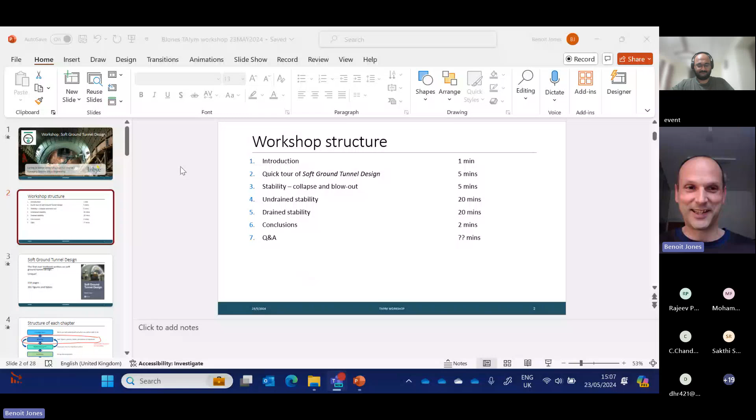Great, thank you. Okay, so to introduce the workshop, it's called Soft Ground Tunnel Design. I won't be able to, in just under an hour, tell you everything you need to know about soft ground tunnel design, so I'm just going to focus on a couple of key things.

So this is the structure of the workshop. We've done the introduction. I'll do a quick tour of the textbook, just so you get an idea of what's in it, and then going to focus on stability, which is the most important thing in tunnel design, and it's the thing that pretty much drives all your decisions about what construction method to use. We'll look at collapse and blowout, and then undrained and drained stability with a couple of examples, and then there'll be conclusions and time for some questions at the end, hopefully.

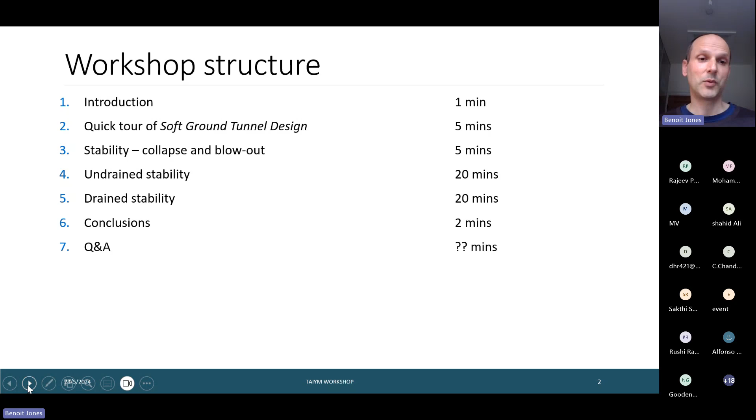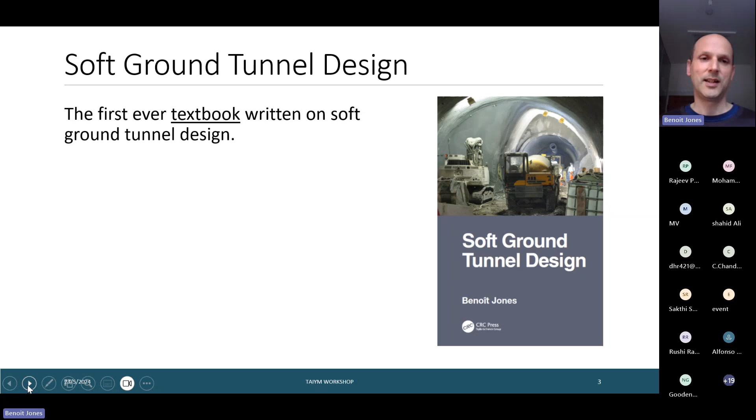So this is what the book looks like. You can get it as softback, hardback, or ebook, or whatever. I say it's the first ever textbook written on soft ground tunnel design, because although people have written books, I don't think any of them has been comprehensive or has included worked examples.

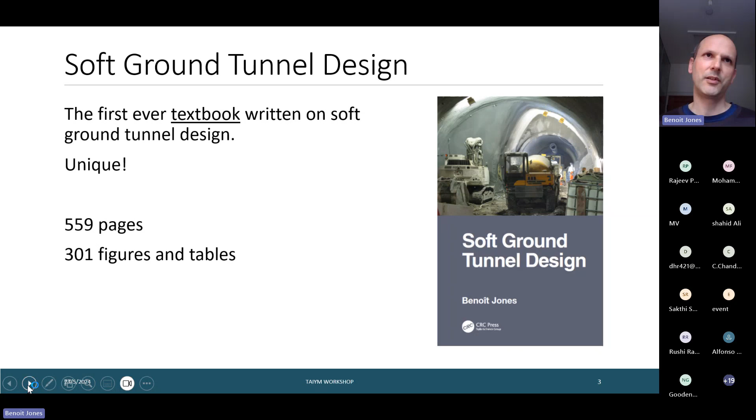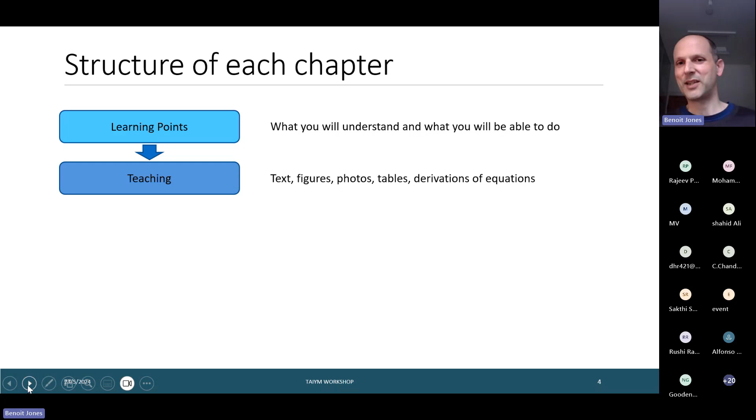So I'll show you what I mean. Each chapter starts with learning points, like what you'll understand and what you'll be able to do at the end of a chapter. It then has what I call teaching, which is the text, the figures, the photos, tables, derivations of equations. And then there's worked examples that show you step by step how to do it. I actually found when I was doing the worked examples that I then had to change the teaching bit, because it's only when you try to go through it step by step that you realize, oh, that bit of information needs to be presented, and you need to make clear that assumption and things like that. So I think that actually improved the writing of the book quite a lot.

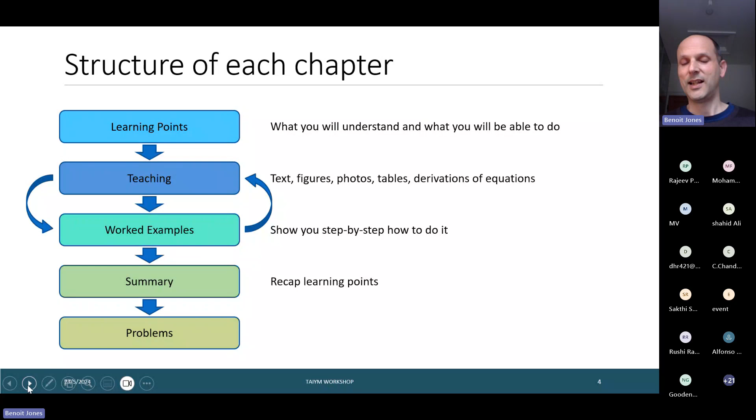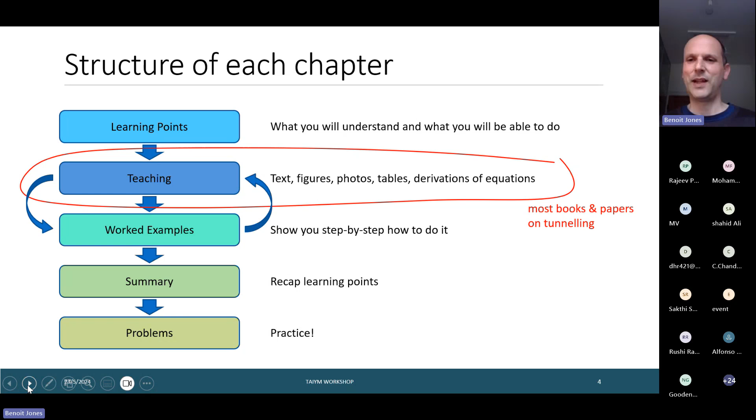And then there's a summary which recaps the learning points, and then at the end of each chapter there's problems to enable you to practice. I'd say most books and papers on tunneling just do that bit, and they don't do all the rest. I assume when you've found a journal paper or a conference paper about a subject you're interested in, you find there's missing steps in there, or it doesn't set out in a worked example how you're meant to do it in the way they've done it, or to apply this knowledge. So hopefully this kind of textbook is filling a gap there.

So there's lots of chapters. Starts off with real tunnel behavior, then undrained stability, drained stability, stability of shafts, stability and Eurocode 7, which, although it's European, is kind of showing how you apply partial factors in different limit states.

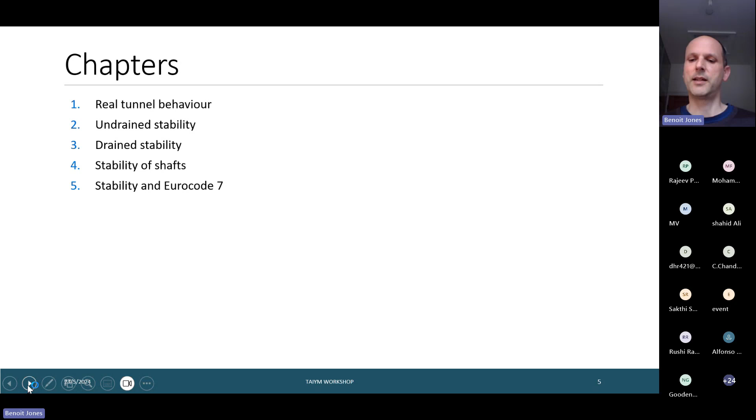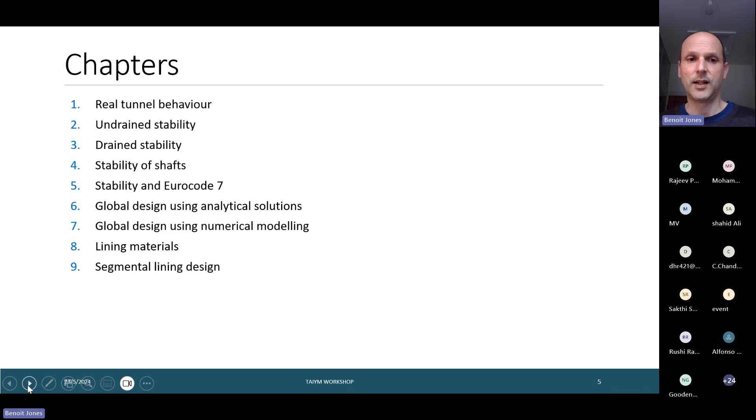So it's kind of an example of that. And then there's global design using analytical solutions and numerical modeling, lining materials with particular focus on fiber reinforced concrete, and segmental lining design for transient loads like demolding, handling, stacking, transporting, loading, jacking and grouting pressures. Chapter 9 is about ground and groundwater pressures on the lining, and chapter 10 is everything else before that point.

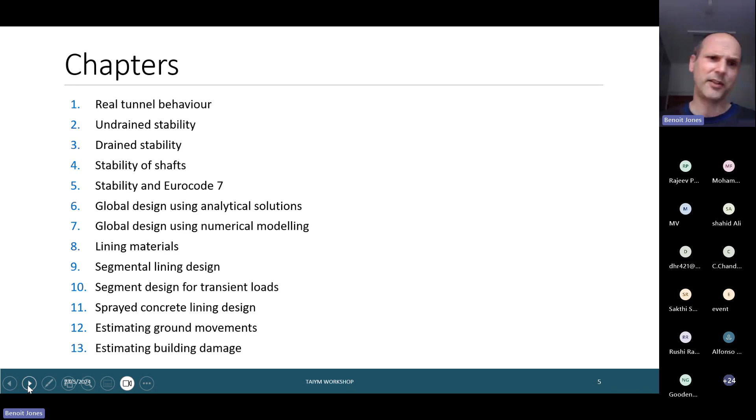Chapter 11 is sprayed concrete lining design. Chapter 12, estimating ground movements. Chapter 13, estimating building damage. So you can see they're grouped: chapters 2 to 5 are on stability, 6 to 11 are soil structure interaction and the structural design of the lining.

Chapter 1 is really everything, because using real case studies it shows data about ground movements around tunnels, surface settlements, subsurface movements, and lining stresses, strains and deformations. The idea is to give the reader a conceptual model in their brain of what is going on when a tunnel is being constructed and then into the long term. So it sets you up for understanding the rest of the book after that.

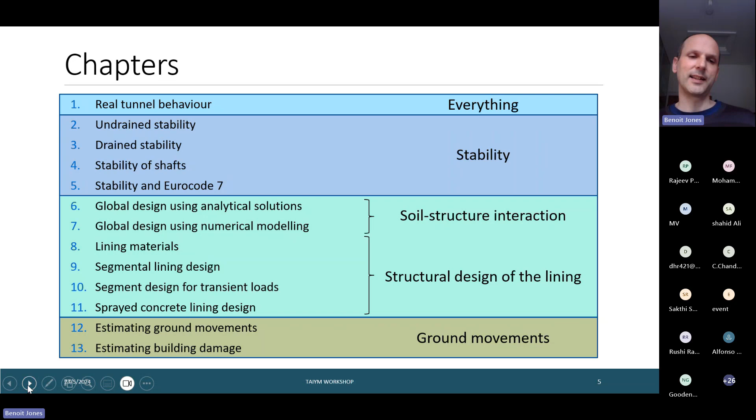So inside the book there are lots of nice pictures, in chapter 1, showing lots of case studies of things moving.

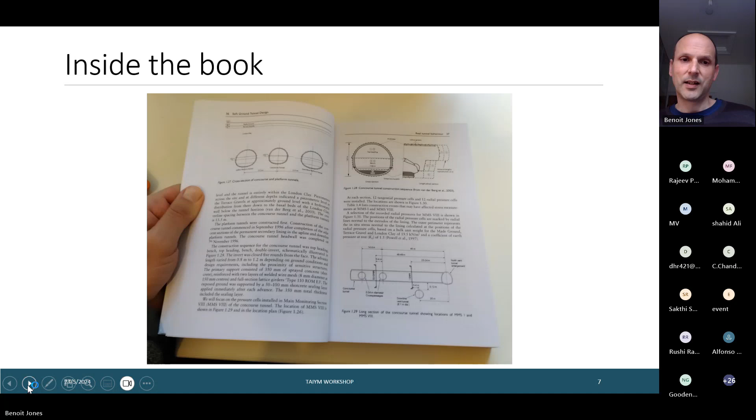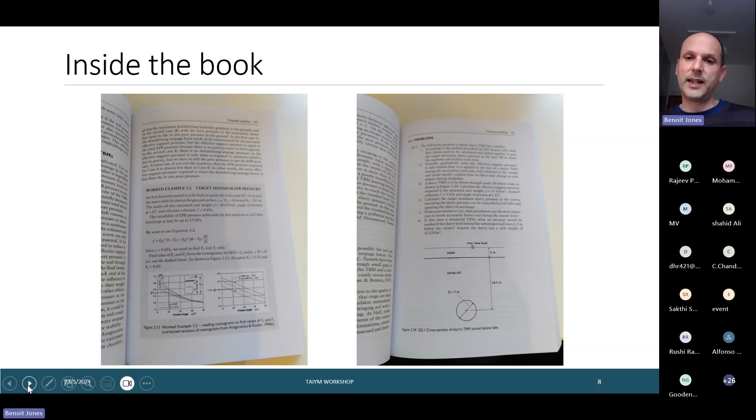Yeah, so a lot of the pictures I drew myself. And then you can see on the left, there are worked examples, usually in grey boxes, so they're separate from the text. There are problems at the end of each chapter, and then there's also references, and at the back of the book's an index.

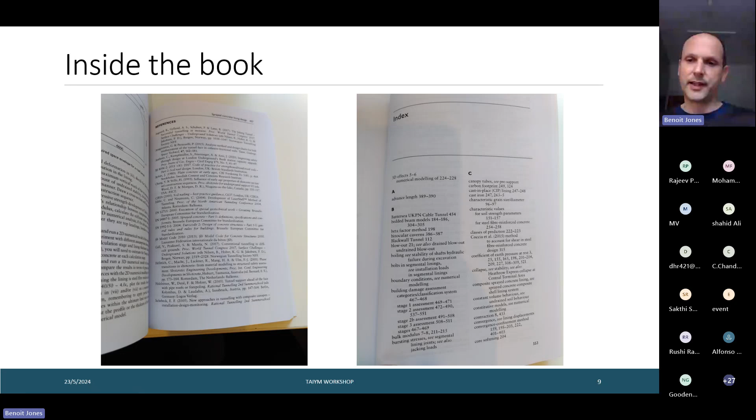So you can use it either as, you can read the book cover to cover, as one of my colleagues did. Or you can just read a chapter you're particularly interested in, or you can go into the index and say, oh, I want to know about, for instance, the convergence confinement method. Where do I find that? And then you can see which pages that's on and find all the references to that. So use it like a reference book.

Okay, so that's enough about the book. So I'm going to talk for a while for the rest of the time, basically, about stability.

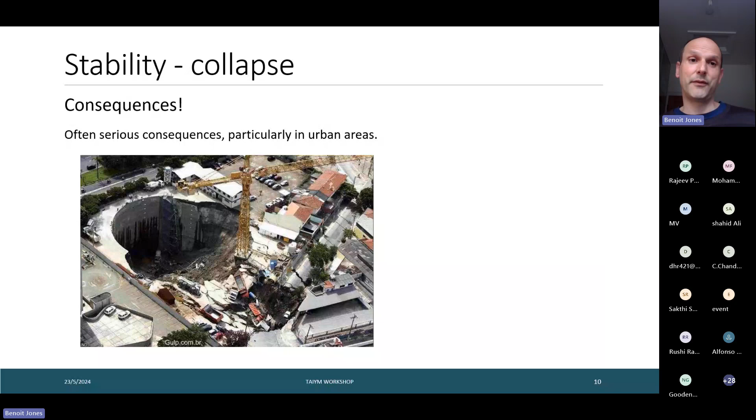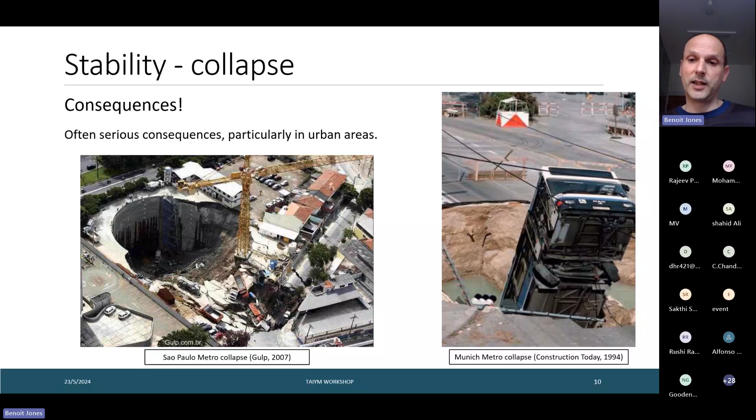When we're talking about stability, it could be the collapse of a tunnel, which would often have serious consequences, particularly in urban areas. On the left you can see the Sao Paulo metro collapse - the tunnel collapsed near the shaft, and then part of the shaft collapsed as well after that. On the right, you can see the Munich metro collapse, where a bus fell into the hole and 2 people died and 30 people were injured. That was in 1994.

With stability, there's also the problem of blowouts, which is kind of the opposite of a collapse - it's when you've got too much internal pressure in a tunnel. There are two main types of blowout. There's a kind of passive failure - like with a retaining wall, you could fail it due to active pressure, or if you push the retaining wall into the ground, you could fail the ground behind it in a passive failure. That's kind of what's happening.

So in this diagram on the right, from Berthoz et al. in 2012, they did a model of an EPB, an earth pressure balance machine, in a laboratory. They were pushing it along, then just stopped excavating and pushed it into the ground and measured how it failed. A passive failure is like a sort of upward moving rigid block. You need quite high forces, especially if the tunnel's deep, very high forces to make that happen. So it's a little bit unlikely - we don't see it very often.

Another possibility is hydraulic fracturing. That's where a fluid - which could be compressed air, slurry or water in the head of a machine - is under too high a pressure, and it literally fractures the ground and escapes down the path it creates. Hydraulic fracturing usually occurs at lower pressures than passive failure, but it only happens when there's fluids in the face of the machine.

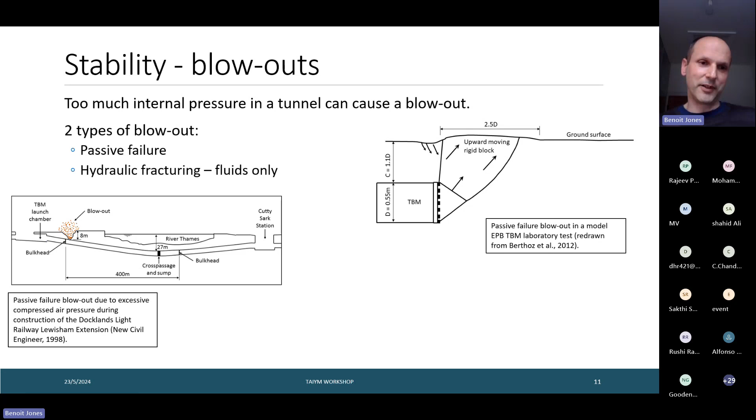And when they were testing the bulkheads, they hadn't done the calculations to check that there was sufficient cover over the tunnel at the shallow point. And it literally blew the segments and the ground up and out. There's a picture here, and you can see a huge crater.

Just the soil's been blown out by the air pressure, and it's in the grounds of the school. You can see the building behind - a lot of the windows have been broken. Luckily, it was at the weekend. You can imagine if it was during a school day, it could have been a huge disaster.

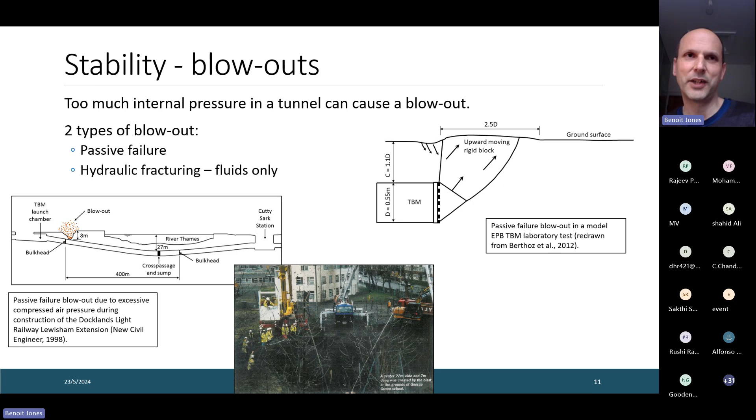So blowouts are also important and shouldn't be forgotten, but for the rest of this presentation, we're going to focus on collapse. It's kind of a bit more common.

So collapse mechanisms - it's always important to start with understanding the geology and the hydrogeology, and then thinking about how could this fail. As engineers, that's always how we design things. We think about how something's going to fail, and then we apply safety factors and make sure it won't happen. But we always have to do that first step of identifying what are the failure mechanisms.

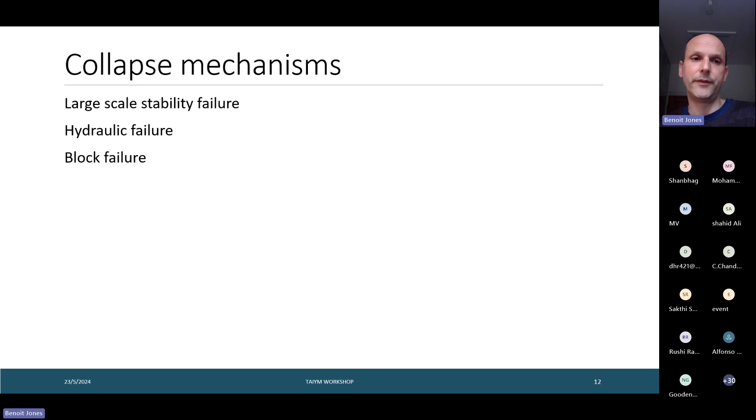So there could be a large-scale stability failure, like the ones we've seen in Munich or the DLR. You could have a hydraulic failure, which is running sand or running ground, where the seepage forces in the ground are taking the soil grains with it. That usually happens in cohesionless soils like silts, sands, and gravels, and literally the flow of the groundwater just takes the soil with it. Or you could have a block failure, particularly in stiff fissured clays, which is similar to a block failure in rock - it slides on discontinuities.

So here we've got a picture of an inrush of sand and water under Green Park. This is in London in 1964. It's using a drum digger shield, basically like a steel can, a shield with a cutter head on the front, but it's not a closed face machine. It's basically an open cutter head, and the cutter head just cuts the ground and loads it onto a conveyor belt.

So what happened was the layer of clay above the crown just got a bit too thin, and it broke through with an inrush of sand and gravel. That's kind of a mix of failures, but in this case the face was completely stable, it just came through at the crown. So that was more of a hydraulic failure - literally the flow of water into the tunnel just brought the sand and gravel with it.

We had the Munich Metro collapse, and that was kind of similar, where the tunneling was in marl - this was conventional tunneling with sprayed concrete. The marl is quite competent, quite impermeable, but above the marl is gravel right up to the surface pretty much, about 15 meters thick. The groundwater level is quite high within that. So where the marl got a bit too thin, it failed, and a load of sand and gravel came into the tunnel.

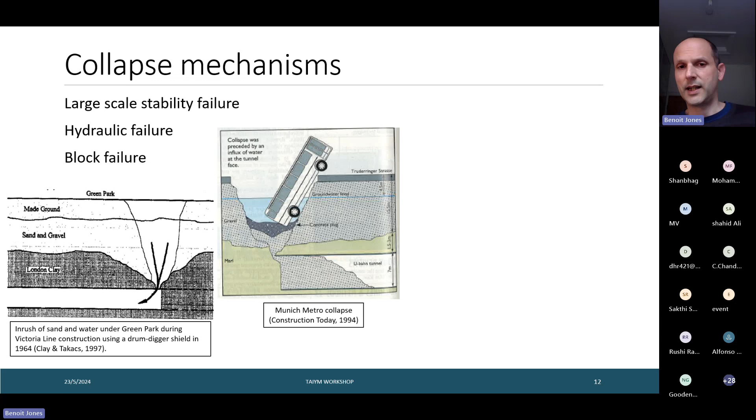So running ground is a big risk in tunneling, especially with open face methods, and we always need to deal with it. Either you dewater or depressurize it so that there's no seepage anymore, or you freeze it or you grout it. But if there's groundwater pressure with no cohesion, it will just flow like a fluid through even very small gaps.

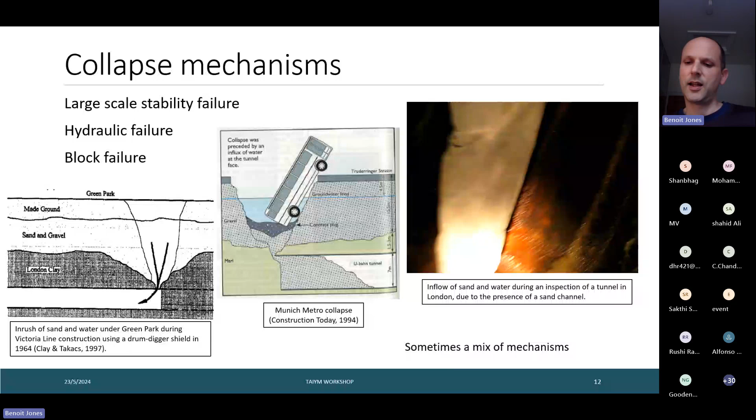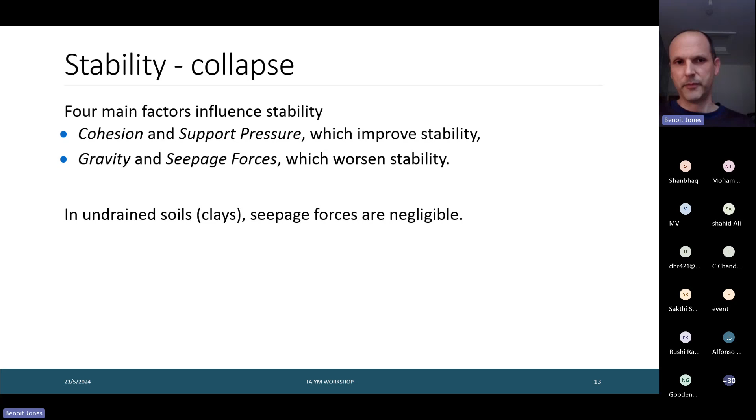So when is a soil drained or undrained? A rule of thumb is that a soil with a permeability less than 10⁻⁷ to 10⁻⁸ meters per second will behave in an undrained manner during the timescale of a typical tunnel construction, and a soil with a higher permeability will behave in a drained manner.

So if you were in that sort of range, 10 to the minus 7 to 10 to the minus 8, you'd probably try and do calculations for both the undrained and the drained case, and then design to the worst case, basically.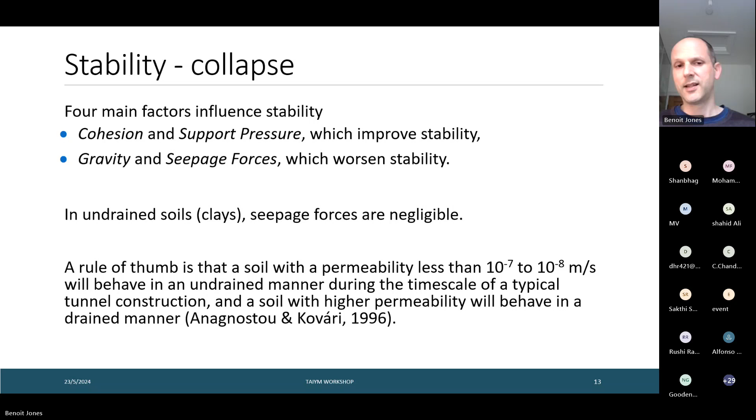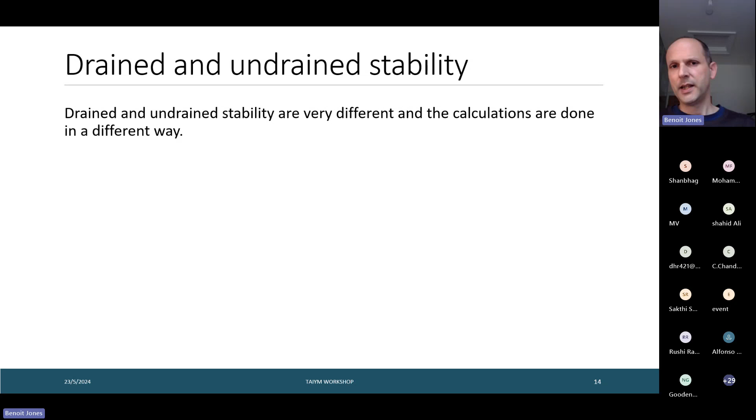So drained and undrained stability are very different in both geometry and mechanism, so the calculations are done in a different way.

So here we've got the geometry of a stability failure in clay and in sand. On the left in clay and on the right in sand. You can see that with clays, we tend to get a large cone-shaped failure, and in sand, we tend to get a very vertical, steep-sided chimney failure.

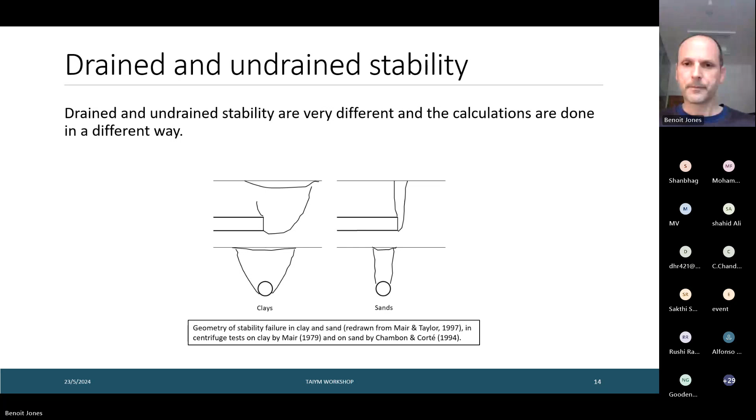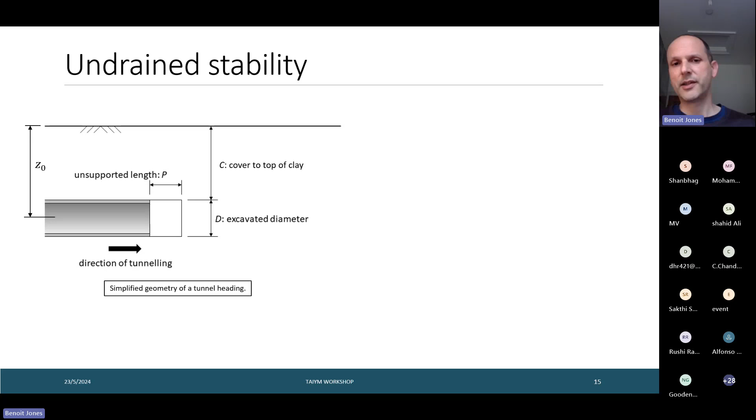So for undrained stability, we tend to simplify the geometry of a tunnel heading like this. We've got Z0 as the depth to the tunnel axis from the surface. We're tunneling here left to right. We have an unsupported length P. In a closed face TBM, we'd probably take that as 0. We've got C, which is the cover to the top of the clay, and D, which is the excavated diameter.

For a sequentially excavated tunnel lined with shotcrete, some assumptions about the value of P may need to be made. Like for a top heading, we often take P to be sort of the advanced length plus a bit to allow for over excavation.

For non-circular tunnels, the diameter D is chosen to give the same face area. So basically, you have the face area of your non-circular tunnel, and you work out what's the equivalent circle diameter, and then you use that as the value of D.

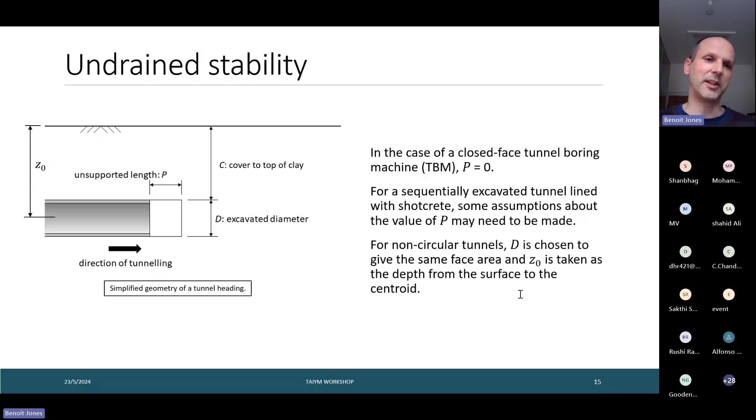Chris Pound did a load of parametric analysis and showed that the shape doesn't really matter, that it makes very little difference. Z0 is taken as the depth from the surface to the centroid, and C is always, even where you're using an equivalent diameter, taken from the crown of the tunnel to the top of the clay.

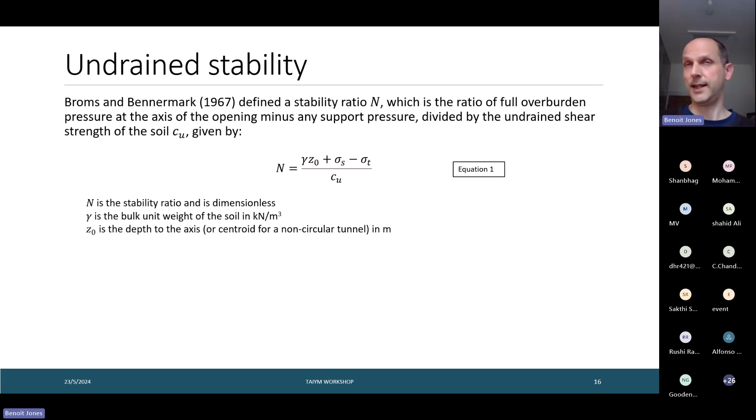Broms and Bennermark in 1967 defined a stability ratio N, which is the ratio of full overburden pressure at the axis of the opening minus any support pressure, divided by the undrained shear strength of the soil. So N is the stability ratio, and it's dimensionless. Gamma is the bulk unit weight of the soil. Z0 is the depth to axis, as we saw on the previous slide. So gamma Z0 is the vertical total stress at the axis level of the tunnel.

This is kind of the effect of gravity, plus sigma S, which is the surcharge. So these together are the effect of gravity. And then we're doing minus sigma T. Sigma T is the internal face pressure, so if it's a conventional tunnel with no compressed air or anything else, then it would just be 0. And Cu is the undrained shear strength.

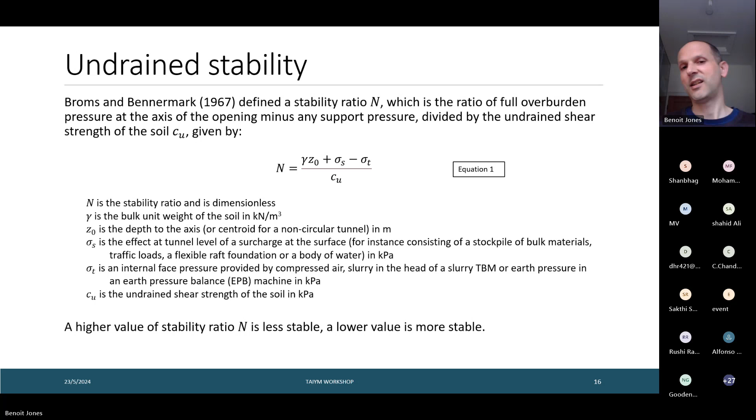So we've kind of got destabilizing actions on top and the undrained shear strength at the bottom. N is just a dimensionless number, and a higher value of N is less stable and a lower value is more stable. So we can see just by looking at the equation, if we increase the undrained shear strength, N reduces, meaning it's more stable. If we increase the support pressure, sigma T, N reduces, more stable. Increase the surcharge or the overburden pressure, then the tunnel becomes less stable.

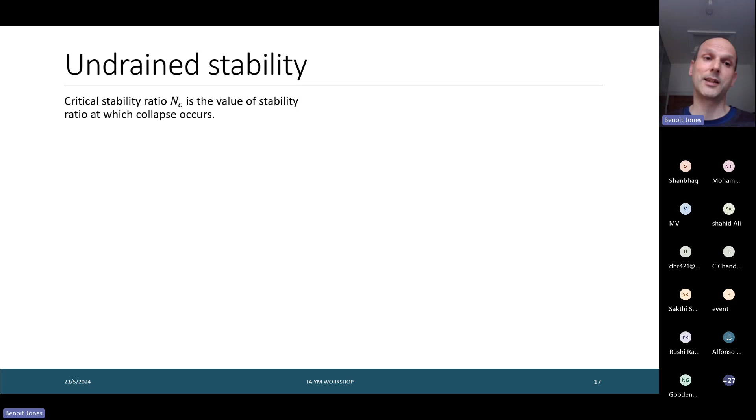So we can define a critical stability ratio, which is the value of the stability ratio at which collapse occurs, and we call that NC, or critical stability ratio. Robert Mair in 1979 performed a suite of centrifuge tests of a tunnel heading in clay at different C/D and P/D ratios, and basically drew some design curves based on that data. So it's very much an empirical relationship.

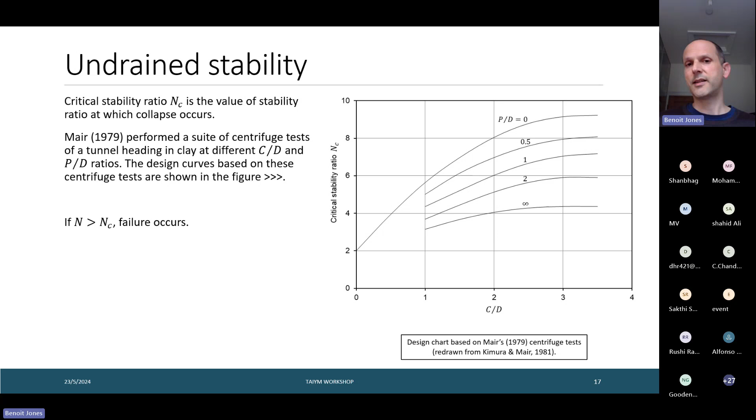So if the stability ratio N is bigger than the critical stability ratio NC, failure occurs.

So the ratio NC over N is the factor of safety for heading stability. If NC over N is less than 1, the heading collapses. Using the German guideline for face stability, we might require NC over N greater than 1.5, so we want a factor of safety on collapse of 1.5. That's similar to the Hong Kong guide to slurry tunnel boring machines, which also says 1.5. So it's not just the Germans.

Also, on the right I've plotted all the centrifuge data, the circles, for P/D of 0, which is zero unsupported length, and P/D of infinity, which is basically an unlined tunnel in clay, which doesn't happen much in the real world but it's there. They also did centrifuge tests for different values of P/D in between, but not exactly 0.5 or 2, so I didn't plot them as it'd be confusing. There's also a couple of real tunnel collapses here for quite small C/D ratios.

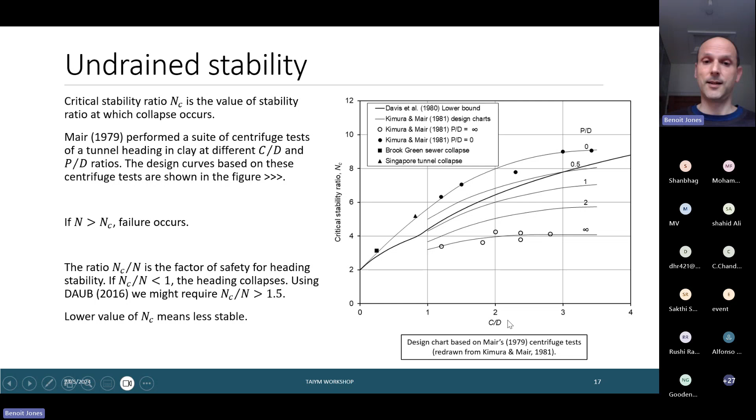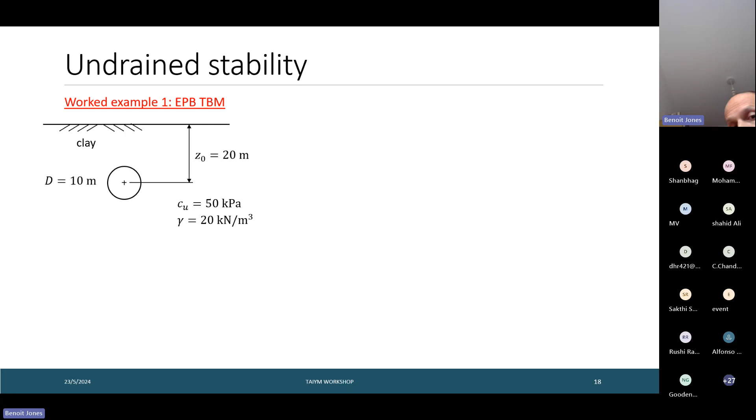So here I've got a worked example. I'm going to try and use my special pen on my screen. We've got a tunnel that's 10 meters diameter. The depth to axis is 20 meters. The undrained shear strength is 50 kPa, and the bulk unit weight is 20 kilonewtons per cubic meter. This is a very simple example - it's all clay and it's all got the same undrained shear strength. In reality things are a bit more complicated, but we'll try that just to give an example.

So we need to use this equation for the stability ratio and this chart. Going to start with, first we need to know what C is, the cover. So C is Z0 minus half the diameter, which is 20 minus 5, so it's 15 meters. Okay, something went wrong there, okay we're back. The C/D ratio is 15 over 10, which is 1.5.

And we said it's an earth pressure balance TBM, so P is 0, so P/D is also 0. So we can look up on the chart, we can find C/D is 1.5, is about there. P/D is 0, so it's about there. So the critical stability ratio from the chart is about 6.8 - always got to be careful that it goes up by 2 each time on the y-axis of the chart.

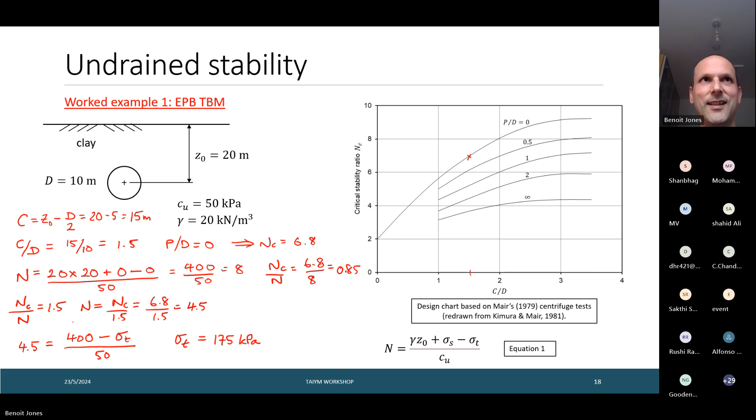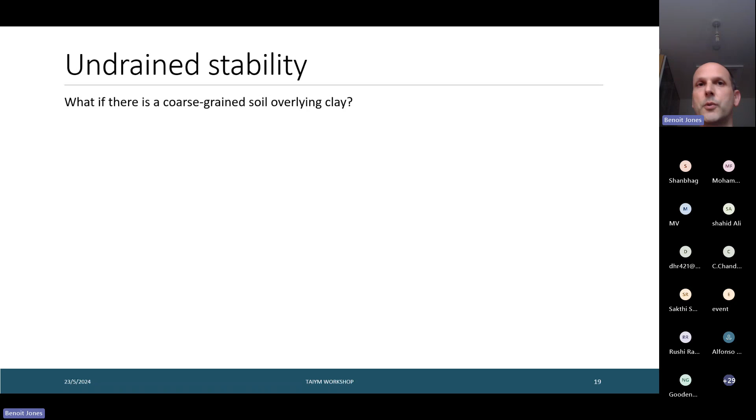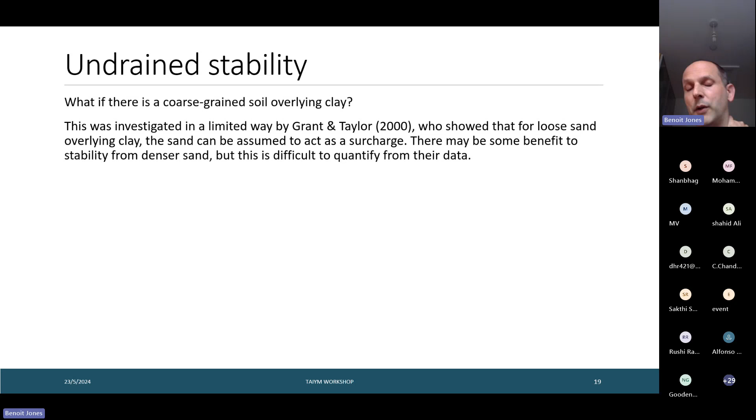One question we could ask: what if there's a coarse-grained soil overlying the clay, so it's not all clay to the surface? In many places we are tunneling in clays, but we have sands and gravels on top in river basins and similar settings. This was investigated in a limited way by Grant and Taylor using centrifuge tests, and they showed that for loose sand overlying clay, the sand can be assumed to act as a surcharge. There may be some benefit to stability from denser sand, but this is difficult to quantify from their data. So what we do is take the cover C to the top of the clay, not to the surface, and count the overlying granular deposits as part of the surcharge.

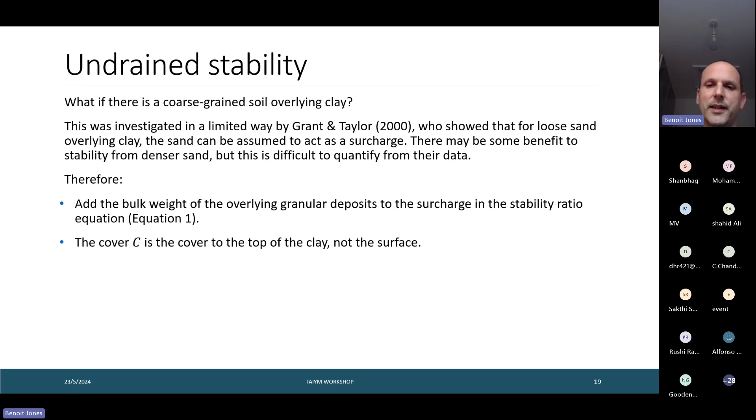If you look at this equation, whether we include it in sigma s or as gamma z0 kind of doesn't matter, it's just the overburden pressure. But we should take C in the C over D ratio for reading the critical stability ratio as the cover to the top of the clay. By taking the cover just to the top of the clay, that's less than taking it to the surface, so that's worse for stability. Having 10 meters of clay above your tunnel is better than having 5 meters of clay and then 5 meters of gravel. It's more stable to have more clay above your tunnel. That's the answer.

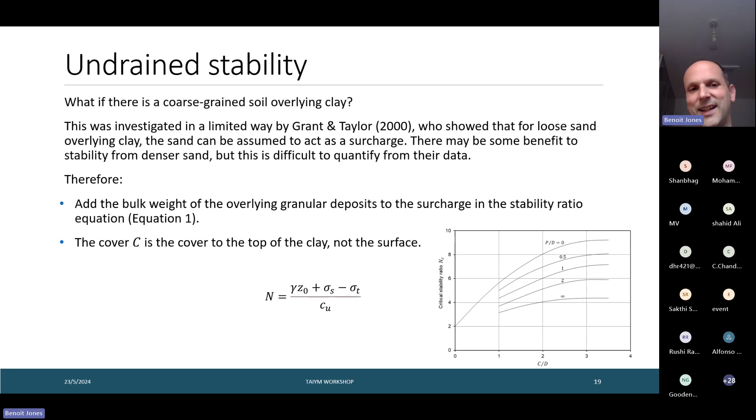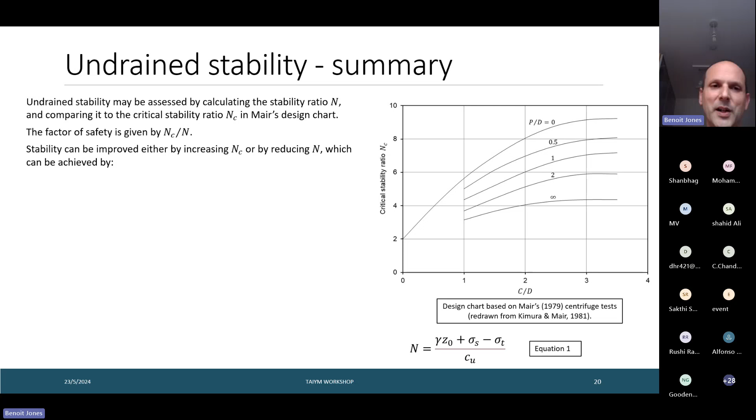So in summary, undrained stability can be assessed by calculating the stability ratio N and comparing it to the critical stability ratio NC in the Mair's design chart. The factor of safety is given by NC divided by N. Stability can be improved either by increasing NC or by reducing N, which can be achieved by reducing the diameter.

Make the tunnel smaller, then that will increase the C/D ratio. We can increase the cover, that also will increase the C/D ratio. We can decrease the unsupported length, that will make the P/D ratio go down, so we're going up in this direction, which is good. We can decrease the depth or the surcharge pressure in this equation, or we can increase the support pressure applied, sigma T. We can increase the undrained shear strength—we don't always, but we could do that by ground improvement, for instance, or by relocating the tunnel.

This is a weird thing: if you look at the equation for N, if you make it shallower, then N is reduced and therefore the tunnel is more stable. But a shallower tunnel has a lower C/D ratio, so it's less stable in terms of the NC value going down. So the N value goes down, but the NC value also goes down, and the net effect kind of balances out. But usually a deeper tunnel, as you go deeper into clay, the undrained shear strength increases with depth—obviously you have to check that with the site investigation and the data you have—but if it increases with depth, then usually you have better stability as you go deeper.

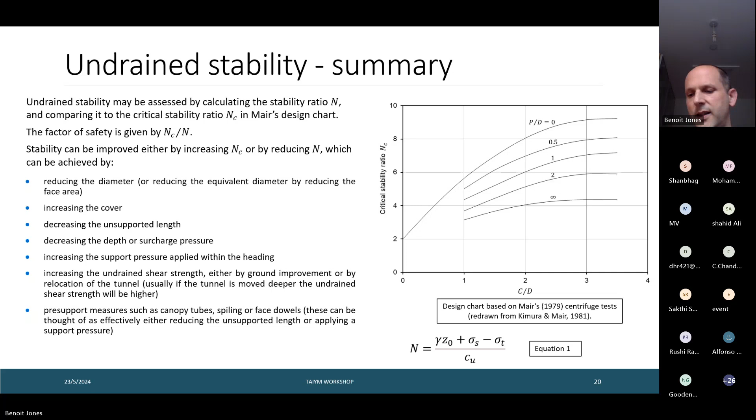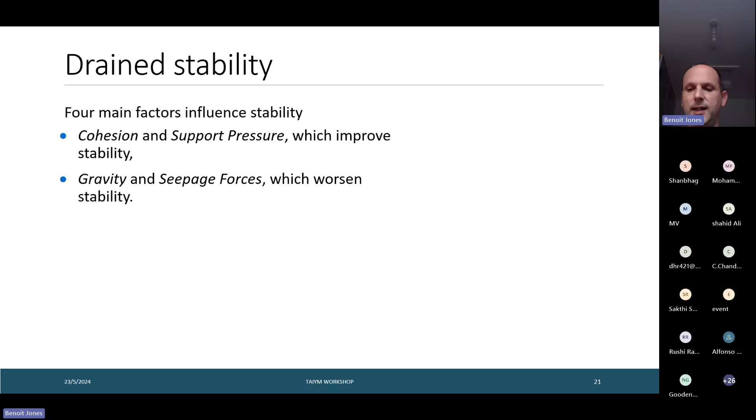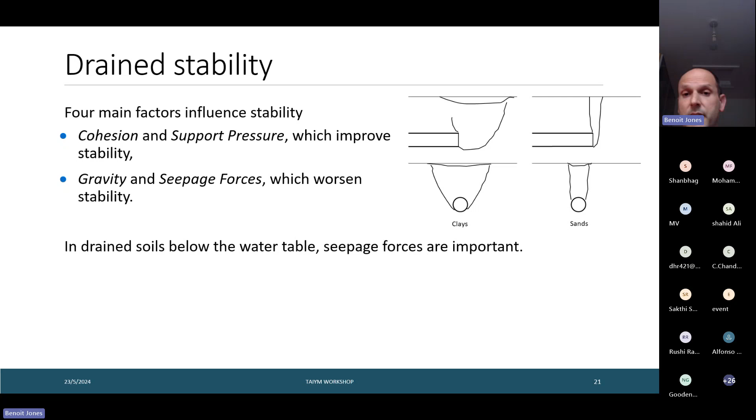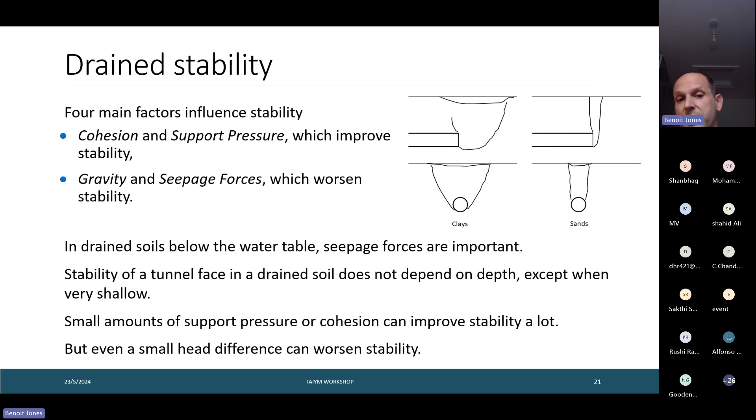Now we've finished undrained stability, and we're going to look at drained stability. Again, the same four main factors influence stability whether it's drained or undrained: cohesion and support pressure improve stability, gravity and seepage forces worsen stability. Remember: undrained materials give a large cone of failure, drained materials give a steep-sided chimney failure. In drained soils below the water table, seepage forces are important. Stability of a tunnel face in a drained soil does not depend on depth, except when it's quite shallow. Small amounts of support pressure or cohesion can improve stability a lot, but even a small head difference can worsen stability.

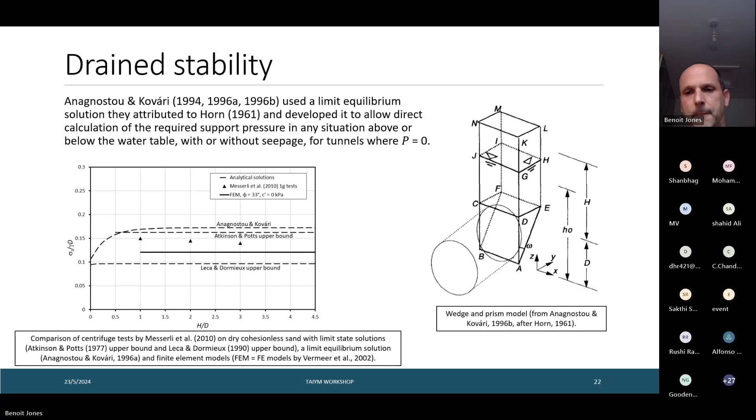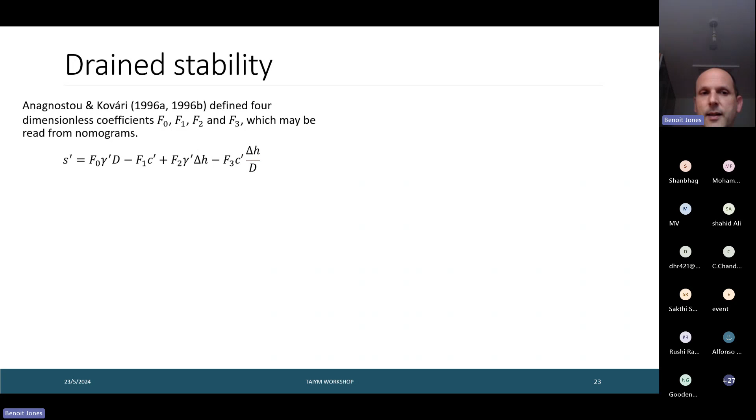So Anagnostou and Kovari defined 4 dimensionless coefficients, F0, F1, F2, and F3, which can be read from nomograms. They did this to make it easier for practitioners. There's this equation where S dash is the effective support pressure required to prevent collapse—the support pressure you have to apply to the soil grains.

F0, F1, F2, and F3 are dimensionless coefficients. Gamma dash is the submerged unit weight if you're below the water table—so it's the bulk unit weight minus the unit weight of water. C dash is the drained cohesion, and D is the diameter of the tunnel.

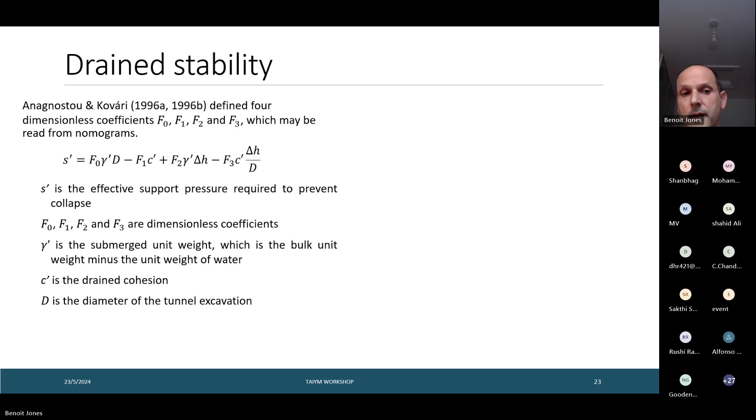Delta H is the head difference between the in situ groundwater head H0 and the head in the excavation chamber HF. So delta H equals H0 minus HF—it's the head difference that drives seepage towards the face of the tunnel.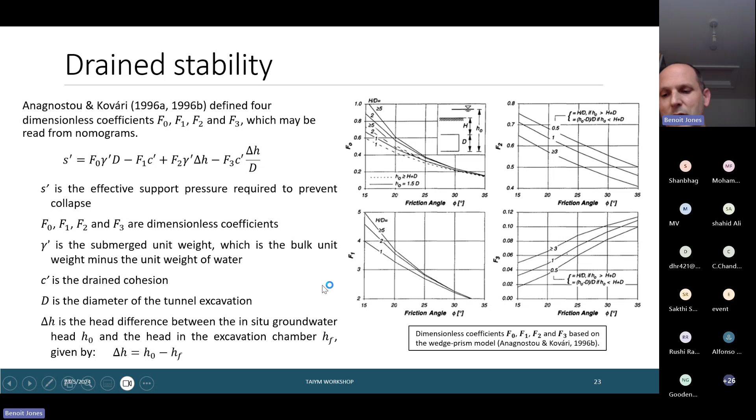They've only given you 2 kinds of examples, so if you want something different, you can use the equations. In my book, I've derived all the equations for the F0 and F1 nomograms, so you can use any position of the water table, and you can even split your soil into different layers. There's lots you can do if you understand the basic equations, which are fairly straightforward in the end. But the easiest way is to use the nomograms, which we'll do just for an example today.

But first we'll just look at how a slurry machine works, because it's actually the simplest example of drained stability—a slurry machine.

The slurry TBM supports the ground by filling the head with bentonite slurry under pressure. The slurry pressure must be greater than the groundwater pressure, because otherwise it would not be possible to pump it into the head of the machine. But also because we need an excess slurry pressure to apply an effective support pressure to the soil grains.

We also need to include an allowance for variability, which I'll talk more about in a minute. The dashed line is the water pressure gradient down through the soil. If we have a slurry pressure higher than that, which we need, this excess slurry pressure hopefully applies pressure to the soil grains themselves. Because if the slurry pressure is just at the water pressure, all that's doing is counteracting the pore pressure in the ground—you need a higher slurry pressure than that to start supporting the soil grains.

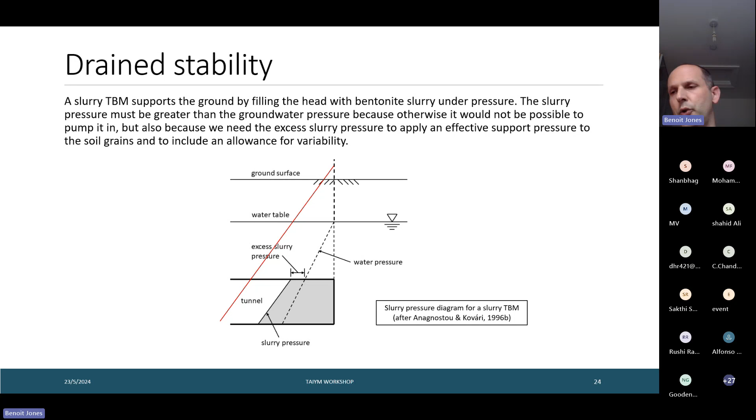But always when we're setting slurry pressures or any kind of face pressures, we always need to calculate what's the minimum we need to ensure stability against collapse, and then what's the maximum we need to not have slurry leaking out somewhere.

So all slurry machines experience fluctuations in the slurry pressure due to dynamic effects such as rotation of the cutter head, excavation and pumping, and due to the difficulty in balancing the slurry feed in and the slurry extraction rate out. Having a mixed shield machine with an air bubble kind of helps with controlling the pressure a bit, but there's always going to be a plus or minus number.

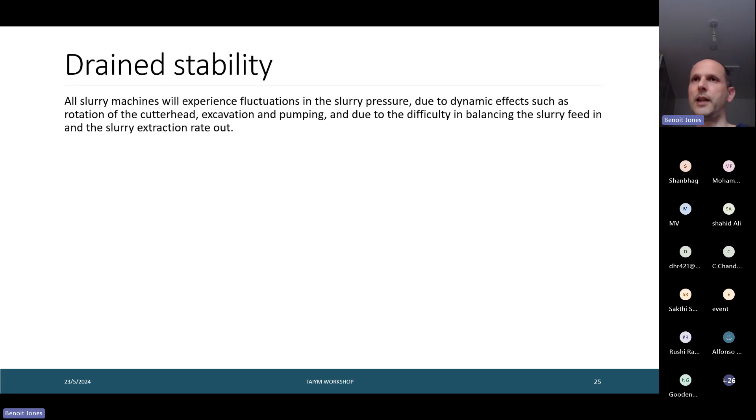And since a drop in the slurry pressure could result in instability and hence over excavation, an allowance for variability is added to the target minimum face pressure. Sometimes a factor of safety of some kind is also included, as well as an allowance for the effects of surcharge on the surface. So this is the equation.

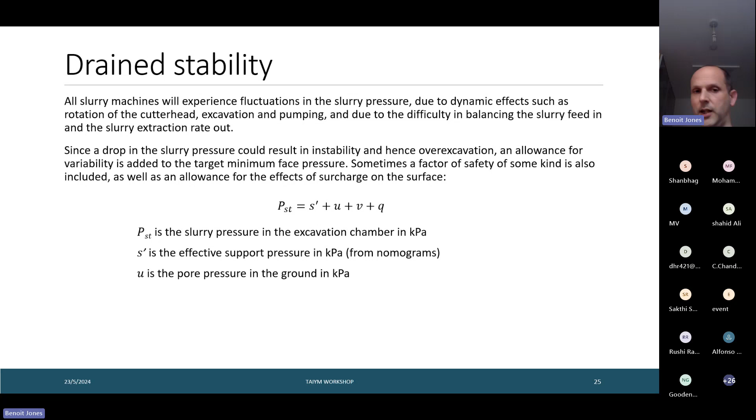So PST is the target minimum slurry pressure. S dash is that effective support pressure that we got from the nomograms from Anagnostou and Kovari. U is the pore pressure in the ground in kPa, and usually if we're calculating the slurry pressure at the crown, we calculate U at the crown as well. And V is the allowance for variability of slurry pressure.

So typically in a very well-controlled mixed shield slurry machine, it might be as low as plus or minus 10 kPa, in which case you would add 10 kPa to this. But in a more traditional slurry machine, or one that's not very well controlled, it might be as much as 30 or more kPa.

Q is an average surcharge pressure applied to the surface. If you're using the actual silo equations, there's ways in which you can include the surcharge in that, and then it actually has less effect and is kind of more efficient. But otherwise you would just add it here if you were using the nomograms.

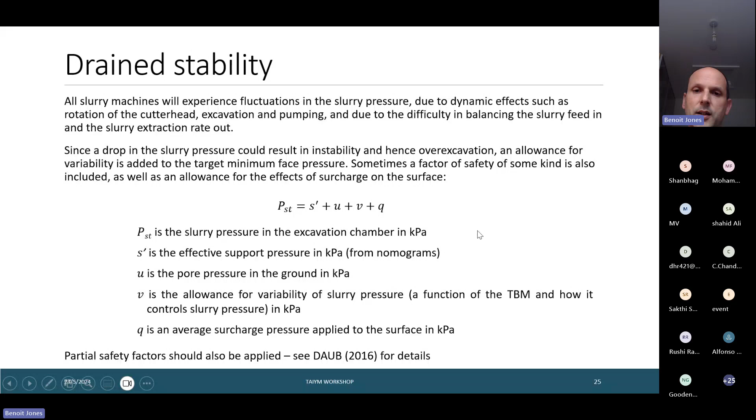So partial safety factors should also be applied. I haven't included them here, but see the DAUB for details. Usually there's a partial factor on the pore pressure, there's also one on the effective support pressure in the other direction, and also on the surcharge.

Okay, so I've got a worked example, I'll quickly go through this. So here we've got a surcharge of 75 kPa. The ground is sand with a bulk unit weight of 18 kilonewtons per cubic meter. The cohesion is 0 and the angle of friction is 30 degrees. We have an allowance for variability of 25 kPa for the slurry machine. We have a cover H of 15 meters and a diameter of 9 meters. And the water table's at the surface.

So from this equation, you can see that if the cohesion is 0, then basically that term is 0 and that term is 0. And if we're using a slurry machine and the face pressure, the slurry pressure, is higher than the groundwater pressure, then we don't have delta H, so that's 0 as well. So we can just use the first term.

So first we need to use the nomogram. We need to know H over D, and H over D equals 15 over 9, which equals 1.67. And in our example here, H naught is the distance from the invert up to the groundwater level, as you can see on the nomogram as well. So in our case, H naught is equal to H plus D. So we're going to use the dashed lines here.

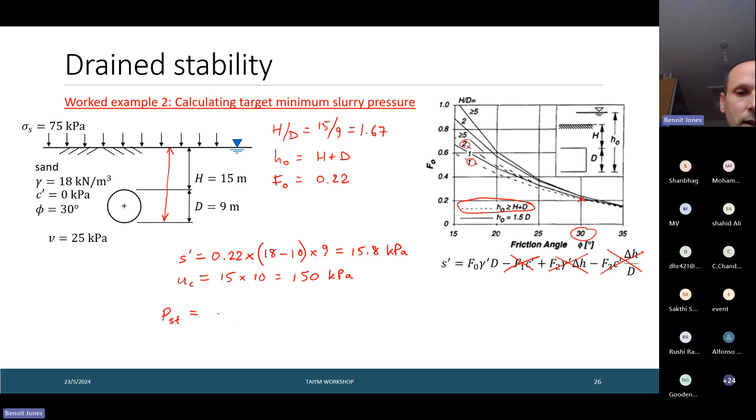So PST, the target minimum slurry pressure, is S plus U plus Q plus V, which is 15.8 plus 150, plus the surcharge 75, plus the variability 25, and that all equals 265.8 kPa. So that's our target minimum slurry pressure.

Using the nomograms makes things quite simple, but as I said, you can use the actual equations - it's much more satisfactory to use the actual equations. More fun if you like maths.

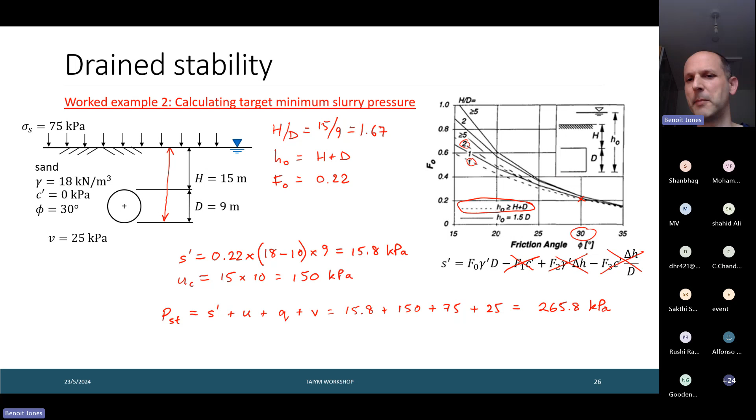Okay, so in summary, just to summarize the key things I wanted to communicate today - it's really important to understand the geology and the hydrogeology and think about the potential failure mechanisms, and beware of running ground. Wherever you've got cohesionless soils below the water table, just think: these will run if I don't do something to either depressurize or take out the water or give the soil some cohesion by grouting it or applying a support pressure.

So always remember 4 main factors influence stability: cohesion and support pressure improve it, and gravity and seepage forces make it worse.